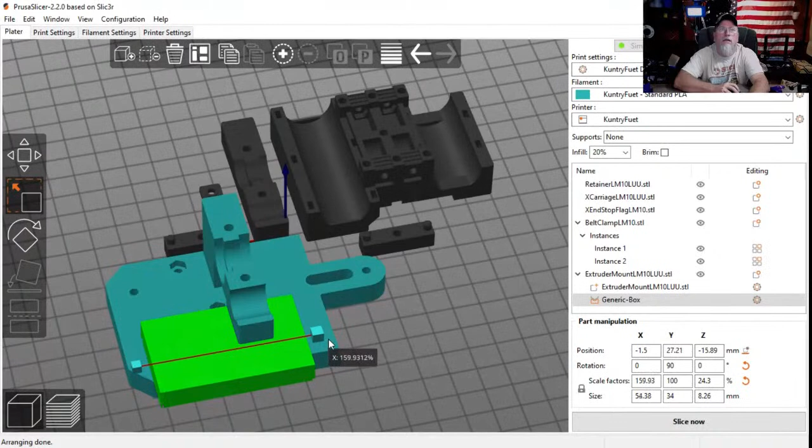Come on, you, not the other one. Alright, so now let's bring that down here. There we go, I need it. I don't need it in that hole right there, so we're going to move it this way. Make sure we're covering everything we need except for that hole, and we are.

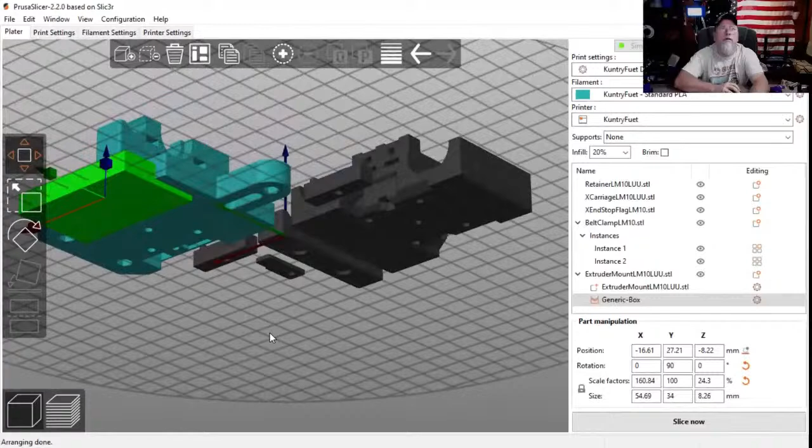Alright, so there's that. Now if I add another one of those - oh nope, that won't work. I forgot, it won't let you do that, which is dumb. You should be able to do it. So I gotta add another support enforcer box over here.

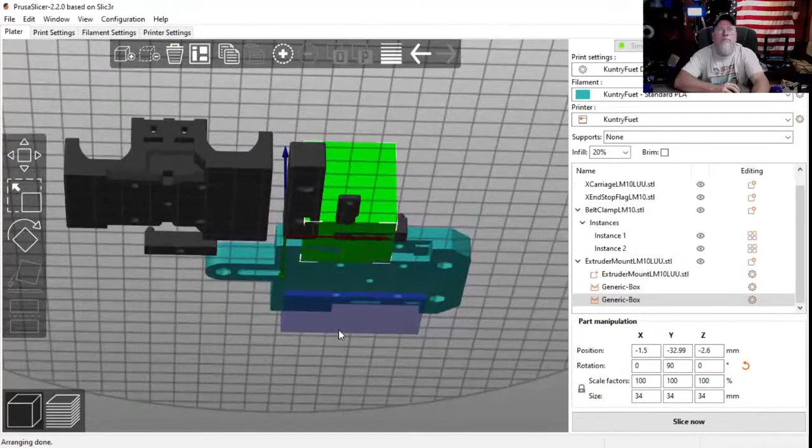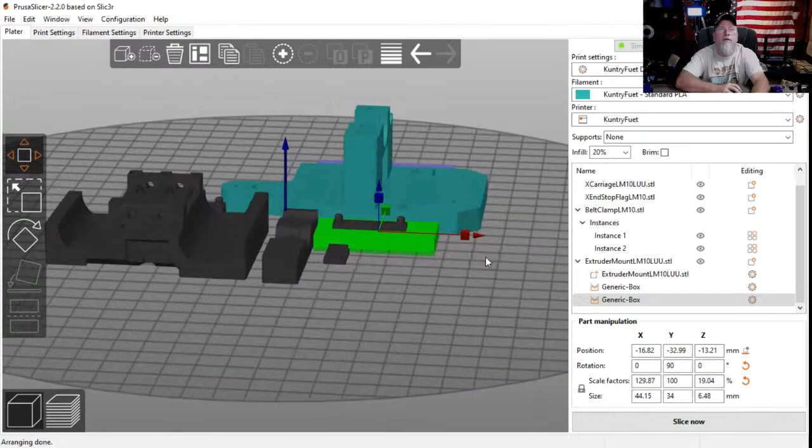Gotta do the same thing. Alright, down. Make it a little longer. Slide it down to here. And drop it down. That should do it right there. Should.

Morning SPC3D, how are you? What's up, Info Mario?

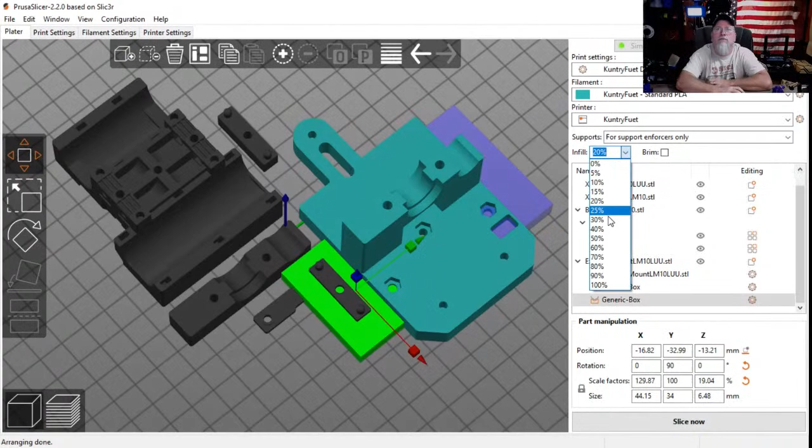So yeah, alright, so this is the one I want. So now if I go up here, let's do for support enforcers only. I want 50% infill, which is what I'm printing all my parts at this time. I know it doesn't really need them, but I'm going to make it that. 50% infill, there we go. Alright, so that should - I got one flag, which I don't really need, but I'm going to print it anyway, because I do want to change it.

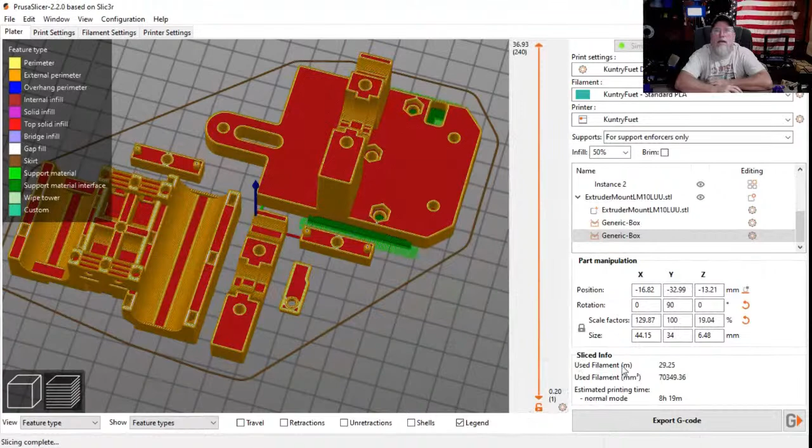I've got a white flag now, I can make a purple one. Soldering some pixels, hell yeah. Alright, so let's slice now. It should take 9 or 10 hours, so 8 hours. So not too bad, 50%.

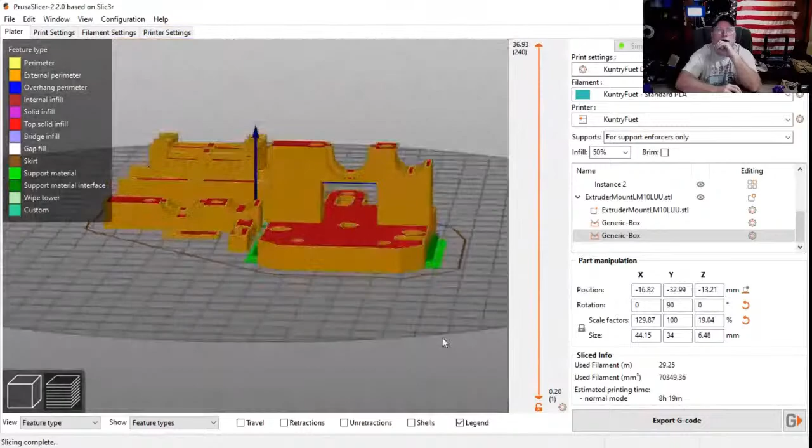Look at my supports, that should be the only place I need support. See, there's another one right there where the holes are, and I don't know what the deal is, but the holes don't go all the way through. So I have to clean these holes out. It's ridiculous, shouldn't have to clean holes out. People, when y'all design parts, make the holes all the way through the damn parts.

Alright, so let's export this. And we're going to say new X underscore carriage and underscore parts. Start printing as soon as it's uploaded. Let's watch it upload. Print. It's uploading to the printer.

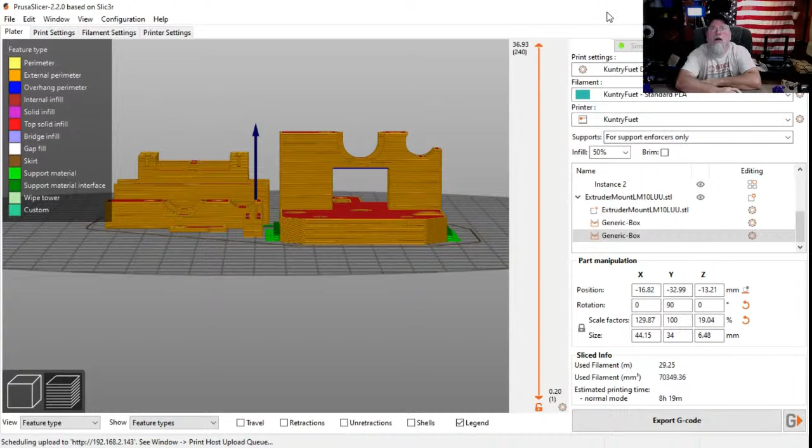And it's printing, I can hear it. It homed already. Alright, so I'm going to move this down here. We're going to go back to green screen here.

Another thing that I have to do is I have to print another one of these XY carriages, because this one, or one of the ones over there - see, I had a jam during the print of these, and I fixed it, I heard it, I fixed it right then. But I guess it made one of these had a glob or something. It made it weak, so when I tightened it down up here to hold the rod, it cracked across the top, and it's broken. So I'm going to print another one of those and put it together.

I'm really hoping, crossing my fingers, and I don't know if it's going to happen because I don't know that all my parts are going to be here. I really wanted to have this thing printing Sunday whenever we were on to VERRF, the Virtual East Coast RepRap Festival. I was really hoping for that.

So I'm really hoping to get it done with the Mosquito Magnum. I've had that thing well over a year, and I wanted it for the Tevo, but I think it'd do even better on the bigger build platform. And I have a special project I'm going to work on as soon as I get it done. I've got the filament coming already. And all of y'all that have been patient with me and all that, I think will absolutely love it. Alright.

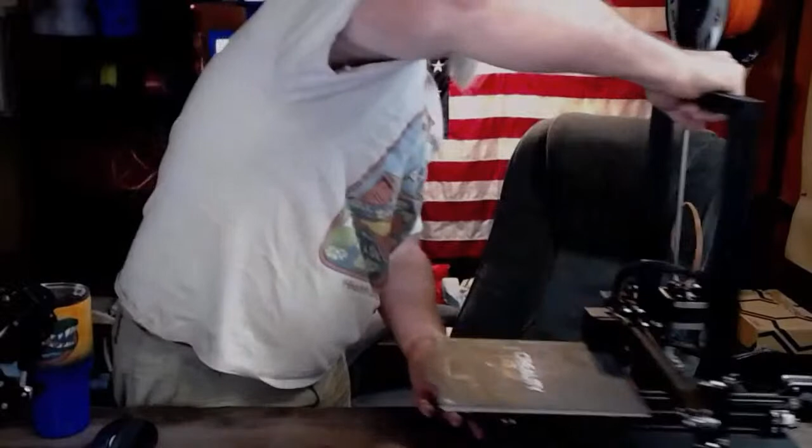This is the CR-20 Pro, and I was having an issue with extrusion, I think is my issue. Clean the bed off, and let's see what's going on. Let's see what's going on here.

First off, let's give it some power. Turn it on and heat it up. And I have to turn it this way. Y'all may not be able to see so good, but my cord's got to reach.

Now let's see, I don't want this orange, get this off of here. Let's find, I know I've got some somewhere. That's 3D Solutech, I've got a couple of rolls of that coming, actually.

Uh-oh, can't see. What time is it now? It is 6:17 in the morning. I am in the Eastern time zone, so that's what time it is.

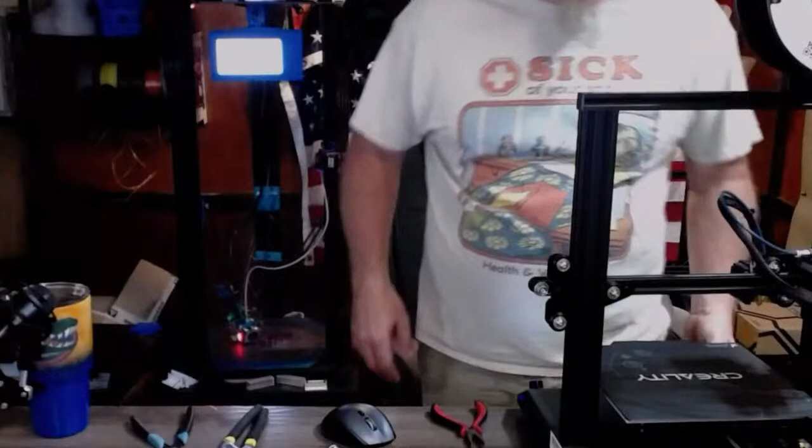Y'all see where I laid that? Cause I don't, I don't see it. I come over here, did I drop it on the floor? No, didn't drop it on the floor. Well, damn it. Anybody? No? All right then, fine.

I'll get another one. There's one more in the drawer. One more, not two, one. One, got one more. No, I swear, I'd lose my head if it wasn't attached.

Alright, so now we should be right back to where we were at before all the filament issues. So let's see what we're getting. Let's print from the card.

3D Benchy G code. Why not, hell with it. Print a Benchy.

Waiting on the bed to heat up now because it says it's got to go to 60, which is good. But it's only doing the filament at 185, and the filament should actually... oh wait, that probably hadn't updated yet. It heats the bed up first, I forget.